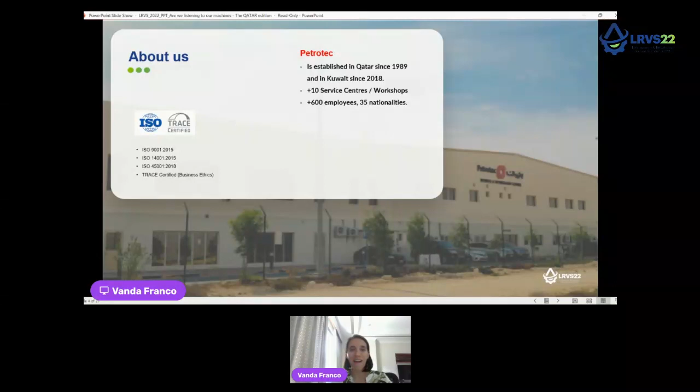Starting about us - Petrotec, established in Qatar since 1989 and in Kuwait since 2018. We are a big company with more than 10 service centers and workshops, and we have more than 600 employees, imagine, 35 different nationalities. Regarding Team Service and Rentals, more related to oil care, we are operating in Qatar since 2007. We have 24 employees in the Purity Solutions department and 6 different nationalities.

Petrotec in general is certified under different ISOs, and we are also trace certified regarding business ethics. Specifically about Team Service and Rentals, we are providing oil care services, mechanical services, and chemical services. Oil care service and mechanical services we provide onshore and offshore. For chemical services, we provide only offshore - there is a different company under Petrotec that provides these services onshore, which is Solarca.

For the oil care services specifically, regarding lubrication, we are providing oil condition monitoring, where we do oil analysis in situ or using third-party laboratories. We are performing oil flushing, oil filtration in terms of particles, varnish, and water removal.

About Qatar - for those who don't know, Qatar is a small country, a peninsula in the Persian Gulf, which is affected by weather conditions such as high temperature and humidity. Both conditions are unfortunately contributing to fast oil degradation, especially the temperature in summer, where the water surface can reach 33 degrees and the air can reach 46 degrees.

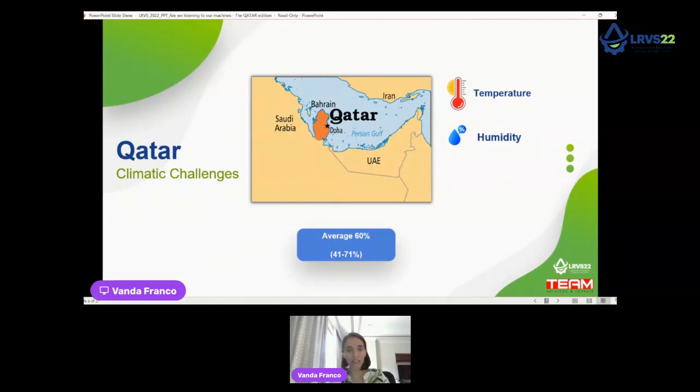Along with the high temperature, there is high humidity, with an average during summertime of 60%. Combining heat, temperature, and humidity, it results in heat stress of the oil, heat stress of the equipment itself, and heat stress of each person working in the field.

Most of the time during summer, we have black flags where all services that are not critical must be stopped during a specific period of the day. The services that are critical need to be studied and controlled to continue under safety conditions. This year, I'm also bringing another weather condition into this, which is the sandstorm.

Usually per year we have sandstorms for about 6-7 days. But this year, not only because of climatic challenges but also because of climatic changes, between March and June we had several days with sandstorms, which yesterday Dr. Juan Flores also spoke about, noting that they are finding the same in Spain.

Unfortunately, due to the format of my video, I cannot show directly the normal sandstorms that happen in this side of the world, but maybe at the end of the presentation you can support me to show a short video, 10 seconds, for you to have an idea of how the weather is here in Qatar.

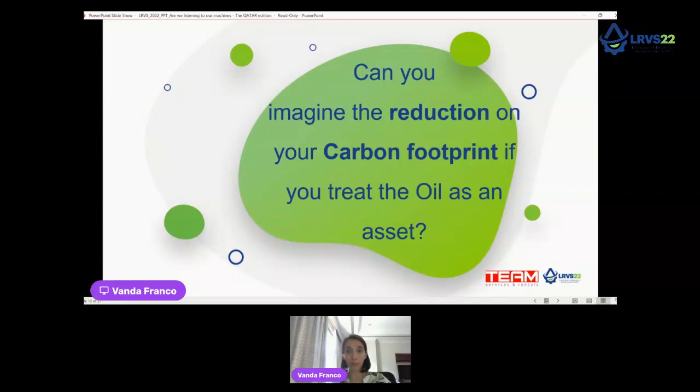So we think about it - can you imagine the reduction in your carbon footprint if you treat the oil as an asset?

How are our customers in Qatar treating the oil as an asset, with our support and the support of the OEMs? They are extending the life of the oil while it's in usage, and they are also preparing their equipment for when they have a plant shutdown and want to do the oil change. They start with oil storage and transfer conditions.

Nothing is perfect, of course, and in Qatar there is a lot of things to do, related to oil storage, because it's not easy to have a room where the conditions are under control. And as I said in the beginning, the weather conditions are totally different from the rest of the world.

In this case, for how they are treating the oil in storage or before transfer, they are doing particle filtration, considering the sandstorms and the different environmental conditions.

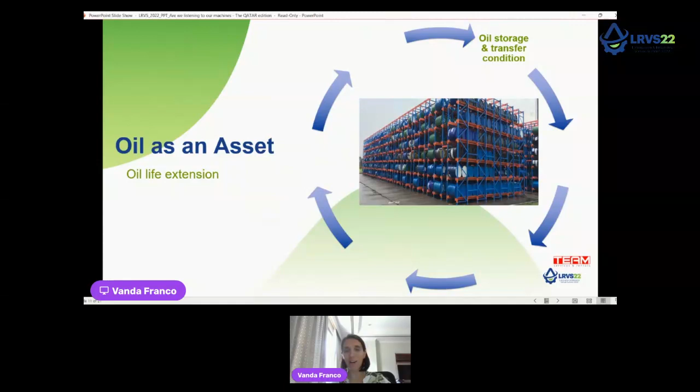While the oil is in use, sampling is performed. As I mentioned, over the evolution of the last 10 years, they are doing more parameters and analyzing more systems, not only turbines and compressors.

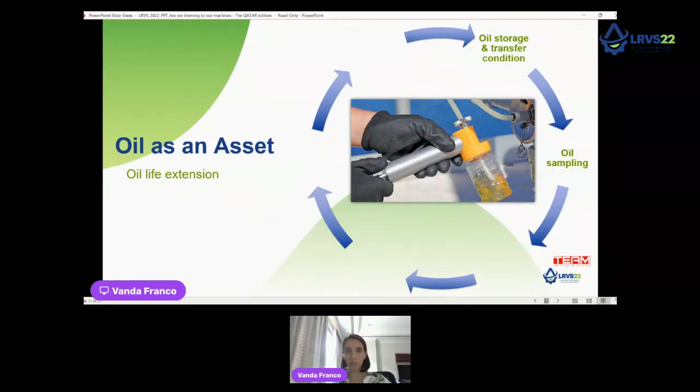In oil sampling, they are taking care and thinking about the correct sampling material, the correct procedure for how to take the sample, and ensuring a representative sample of the system by selecting the correct sampling point.

The oil analysis can be performed on site by themselves, or they can request a third-party accredited laboratory to perform the analysis.

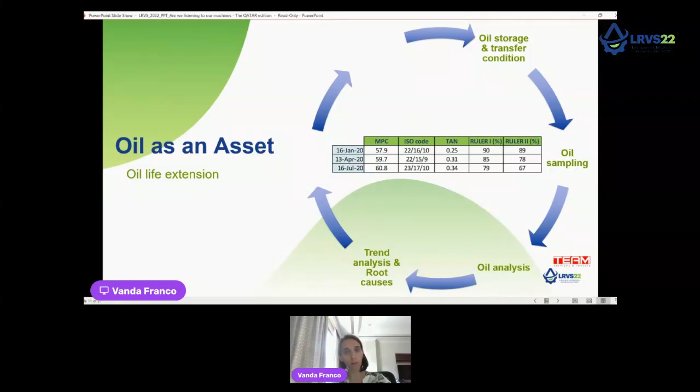Based on the reports, they are analyzing trends with at least 3 results from different years and different timings of the same year. Based on maintenance activities, OEM recommendations, service provider recommendations, and machine history, they try to find the root cause of the problems. To extend the life of the oil, they are cleaning and requesting to clean, as I mentioned, with tenders for particle filtration, water removal, and varnish removal.

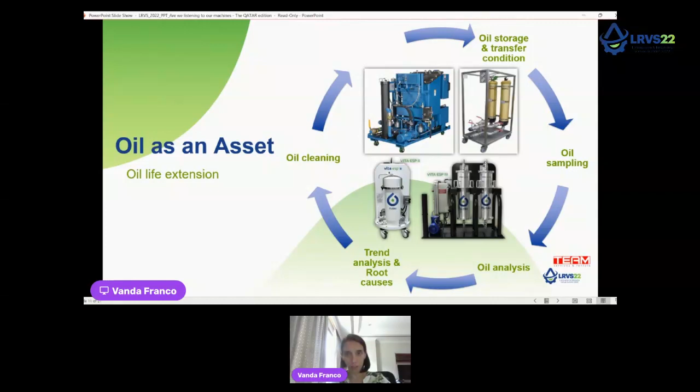As a preventive measure against degradation after cleaning the oil, most customers in Qatar are using Decon Solvancer to mitigate, control, and prevent future formation of varnish, while also knowing they need to do machine condition monitoring.

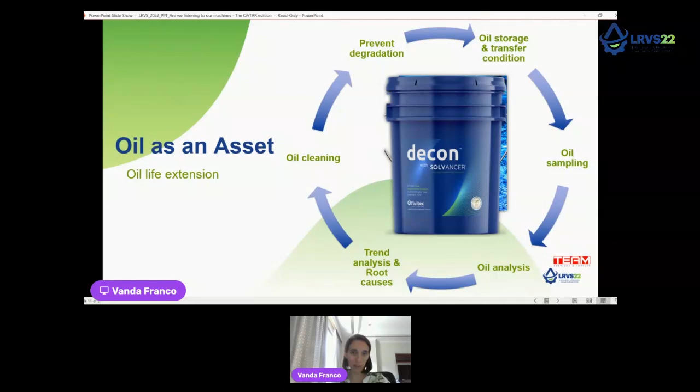Specifically for phosphate ester oils, they are using dry air blanketing systems, where it's possible to control the water content in the oil and remove it through the air. It's a clean process.

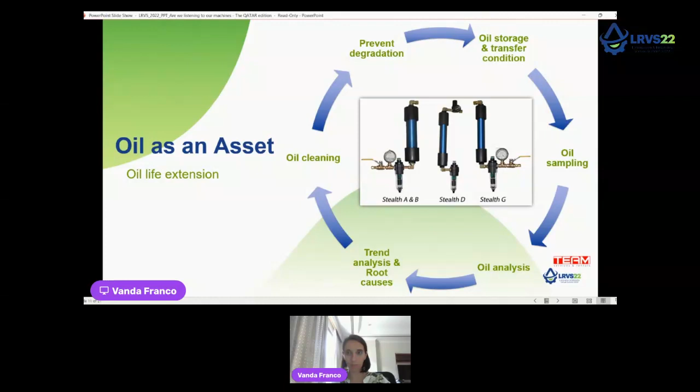If you treat your oil as an asset and take care of your machine, you increase equipment reliability. In Qatar, by applying the oil care program and correct solutions, our clients are following these 4 stages to increase equipment reliability.

First stage, and one of the most important, is training of manpower to know how to operate the machine, not only when it's running, but when it's shut down, to open and close the machine after maintenance. Stage 2, as mentioned, oil sampling and analysis and following the trend.

As stage 3, along with this analysis, they are checking the symptoms of the machine and listening to the machines as well. Depending on the planned activity, shutdown, oil change or upgrade, or even oil extension, they apply the correct solutions.

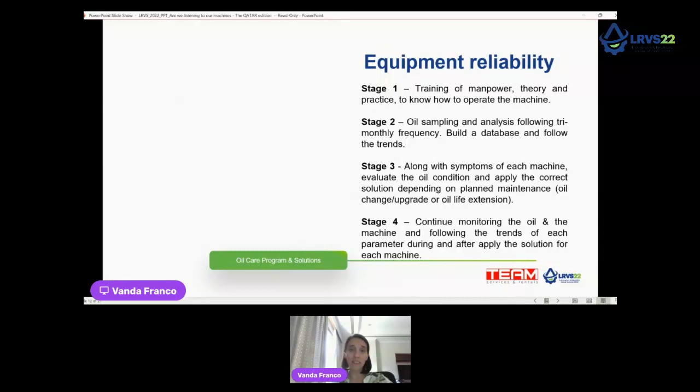After this application, after taking care of the oils, they continue doing oil analysis to make sure everything is going well. As an example, I'm bringing an offshore case study where equipment reliability of 27 machines was increased from 2017 to 2022. During these 5 years, it was not easy, it was not fast, but it was possible to do.

Out of the total 27 machines, in 2017, 21 machines were showing serious evaluation in terms of oil condition and in terms of symptoms of the machine, such as bearing temperature and high vibration in the bearings. Even the lube oil temperature was showing high temperatures, with some spikes in certain cases.

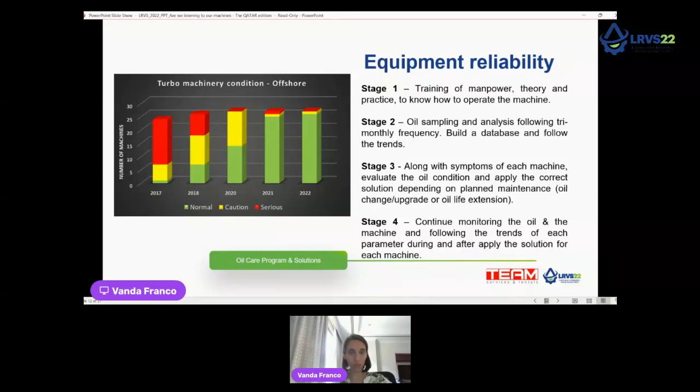By applying the correct solutions, it was possible through the years to increase the reliability of each piece of equipment and keep the condition of the equipment and the oil in good condition. So in 2022, we can see that only one machine is having a caution evaluation at this moment, related to the oil, which will be changed next month.

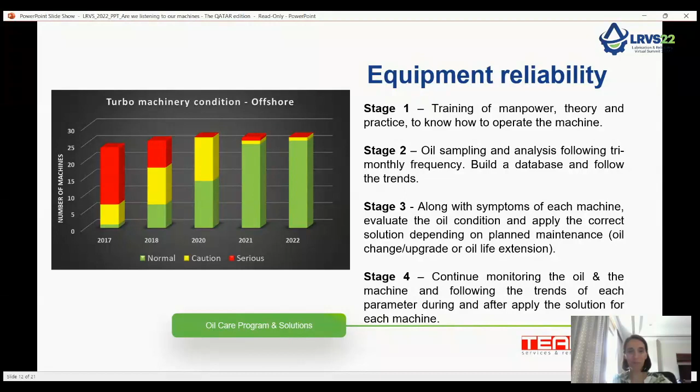I'm bringing to you some examples of cost savings among our customers in Qatar. One of the major oil and gas operators in Qatar was able to save $275,000 by extending the life of the oil in one of the machines.

Imagine the other one. In one of the machines, it was possible to extend the life of the oil, avoiding unexpected downtime, meaning avoiding unexpected shutdown. For this specific case, our customer came to us showing that with intervals of 15 days, different main lube oil filters were replaced. For 3 times they were replaced, showing the appearance of black deposits.

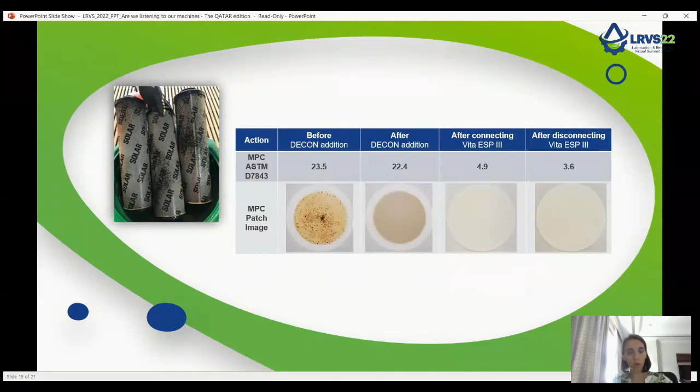They also mentioned that the bearings were showing vibration and high temperature. As a solution, we applied decon, as mentioned before, which we are applying in Qatar. After decon controlled the deposits, we were able to hook up the varnish filtration unit to clean the oil. It was possible to keep the oil clean for more than 1 year before the plant shut down.

As a second case, I'm bringing an example from an onshore oil and gas company, where this company was able to save $300,000 by eliminating the downtime associated with flushing before oil change and the cross contamination after oil change.

As I mentioned, it's not only about oil life extension when it's in use, but also the oil life extension when we are changing the oil. So we want the new oil, when changing, to also be done properly. The oil change needs to be done properly. The machine needs to be prepared and clean to make sure it's free of contamination to receive the new oil, avoiding cross contamination between the old oil and the new oil, keeping it longer in the system.

For this specific case, the machine was not showing any kind of symptom, but the oil condition was showing high MPC.

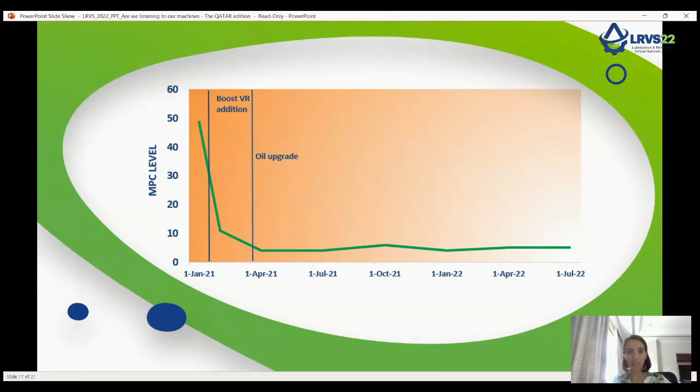The third case that I'm bringing to you is related to a major chemical company where the oil life was extended and again unexpected downtime was avoided. It was possible to save $361,000. In this case, the customer had the oil in the system for 9 years, but his plant shutdown was in 1 year. So he was not able to shut down the machine to do the oil change and requested a life extension.

For this case, we also used Decon and the varnish removal unit. As you can see, after stopping the varnish filtration unit, it was able to extend the life of the oil for another 375 days, so more than the 1 year that the customer was expecting, and it was possible to do the oil change only when it was planned.

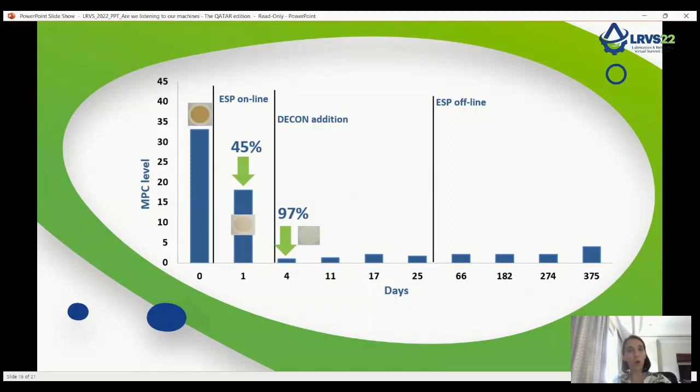As the final case for today, I'm bringing a major offshore oil and gas operator. $2 million were saved in this case, where over 5 years it was possible to increase the reliability of 27 machines with a capacity between 1,500 and 50,000 liters.

I'm leaving you with this: your oil and machine are talking. Are you listening to them?